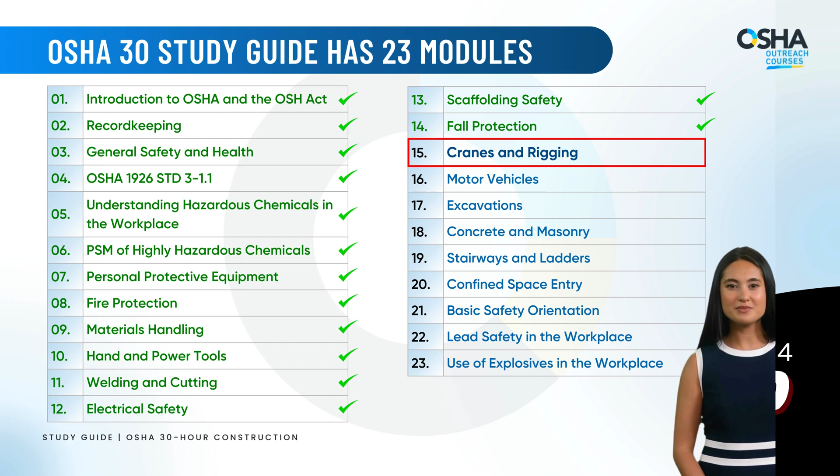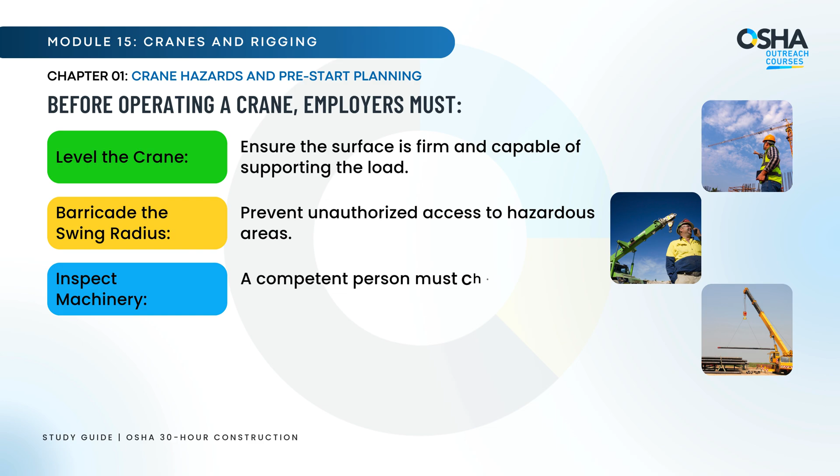Before operating a crane, employers must level the crane, ensure the surface is firm and capable of supporting the load, barricade the swing radius, prevent unauthorized access to hazardous areas, inspect machinery. A competent person must check for defects or hazards, coordinate with power line owners, maintain safe distances and clearances.

Remember, preparation isn't optional, it's a critical first step in crane operations. Now, let's test your understanding. Take a moment to think about these questions and discuss them with your colleagues.

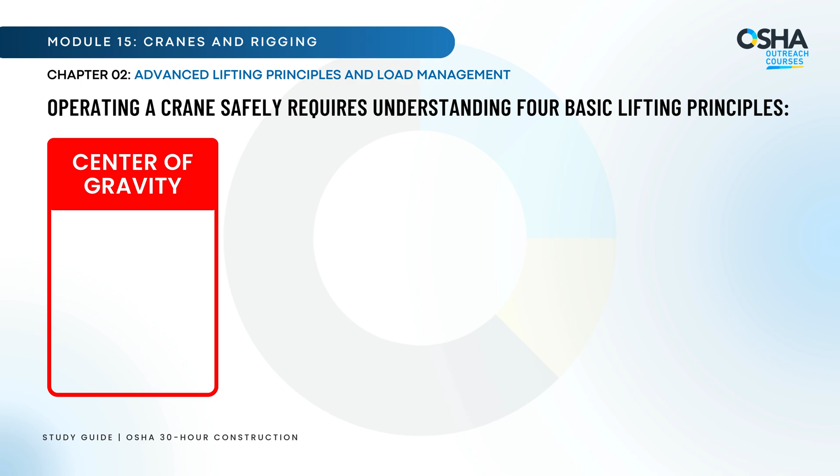Time to move to Chapter 2, Advanced Lifting Principles and Load Management. Operating a crane safely requires understanding 4 basic lifting principles. Center of gravity, the point where a load's weight is evenly distributed. Leverage, the use of balance to prevent tipping during lifts. Stability, the relationship between load weight, boom angle, and radius. Structural integrity, ensuring all components work cohesively to support loads.

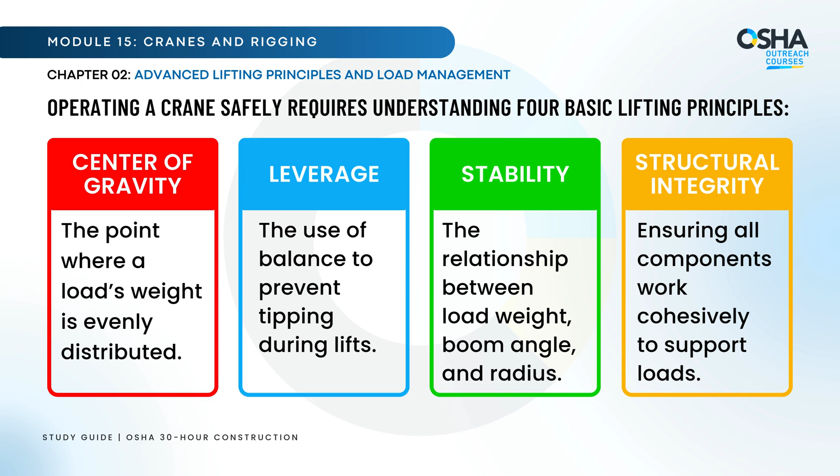Crane operators must identify load weights found on shipping documents, verify lift calculations to ensure the load is within the crane's rating, consider external factors like wind conditions, side loads, and uneven ground.

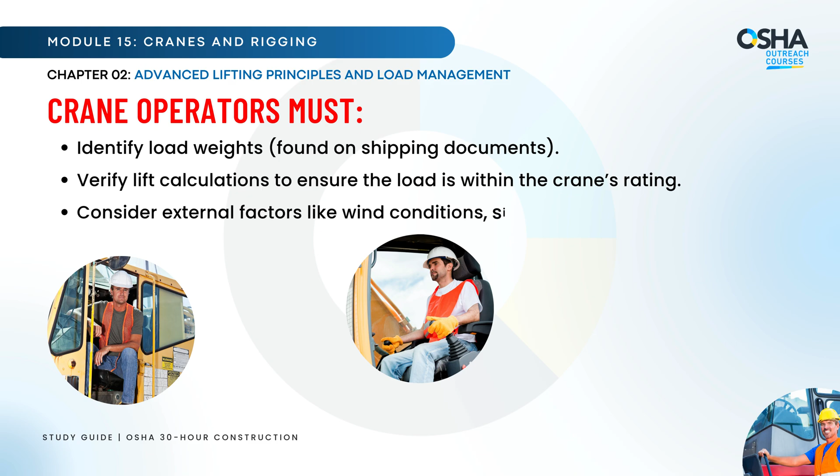A worker once underestimated the impact of wind during a lift. The swinging load caused the crane to destabilize, nearly toppling it. The lesson? Always consider weather and site conditions before starting a lift. Mastering these principles ensures safe and efficient operations, protecting both workers and equipment.

Now, let's test your understanding. Take a moment to think about these questions and discuss them with your colleagues.

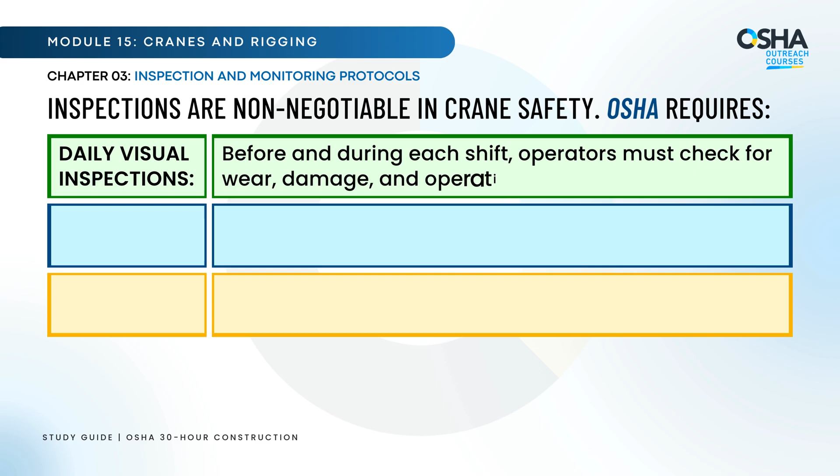Welcome to Chapter 3, Inspections and Maintenance, Preventing Catastrophes. Inspections are non-negotiable in crane safety. OSHA requires daily visual inspections. Before and during each shift, operators must check for wear, damage, and operational issues. Monthly inspections, conduct a more thorough review and keep records on site. Annual inspections, a documented, comprehensive check by a competent person.

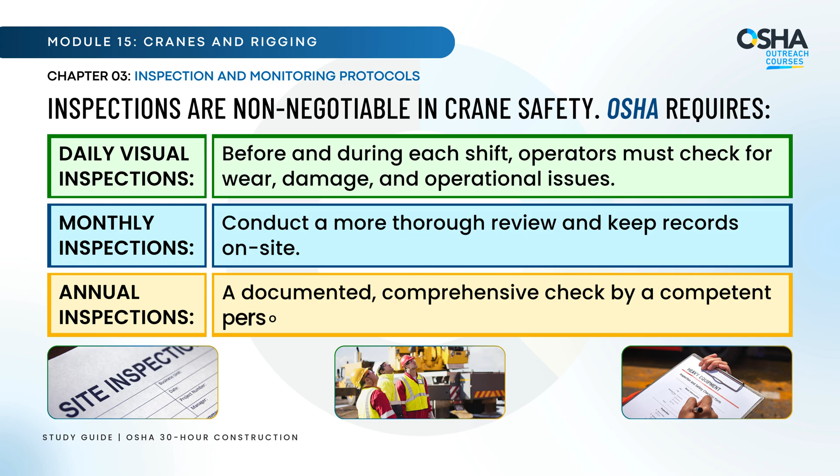What to inspect? Wire ropes for frays, kinks, or broken strands. Brakes, outriggers, and boom angle indicators for proper function. Bolts, nuts, and other hardware for wear or looseness. Hydraulic leaks and tire pressure.

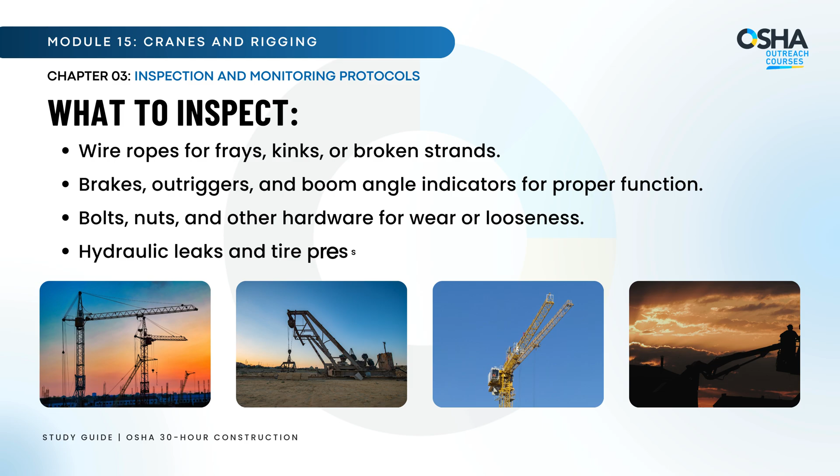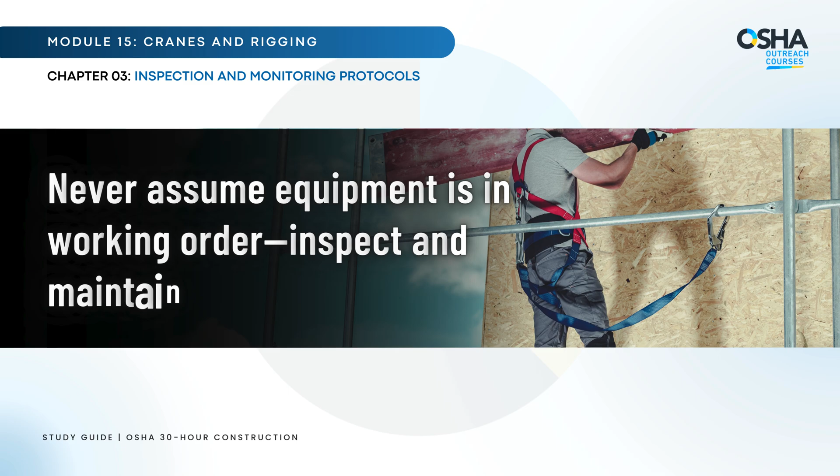During a shift, a loose bolt on a crane's rotating superstructure went unnoticed. When the crane began to swing, the bolt gave way, causing a collapse. Regular, thorough inspections could have prevented this incident. Never assume equipment is in working order. Inspect and maintain it meticulously. Now, let's test your understanding. Take a moment to think about these questions and discuss them with your colleagues.

Here's the final chapter, Rigging and Personnel Platforms, Ensuring Safety in Advanced Operations. Rigging is a specialized skill that demands precision and adherence to safety standards. Here's what OSHA requires. Rigging requirements. Only use equipment rated for at least 5 times the maximum load. Prohibited practices. Avoid using cranes to hoist personnel unless no safer alternative exists. Even then, strict criteria must be followed.

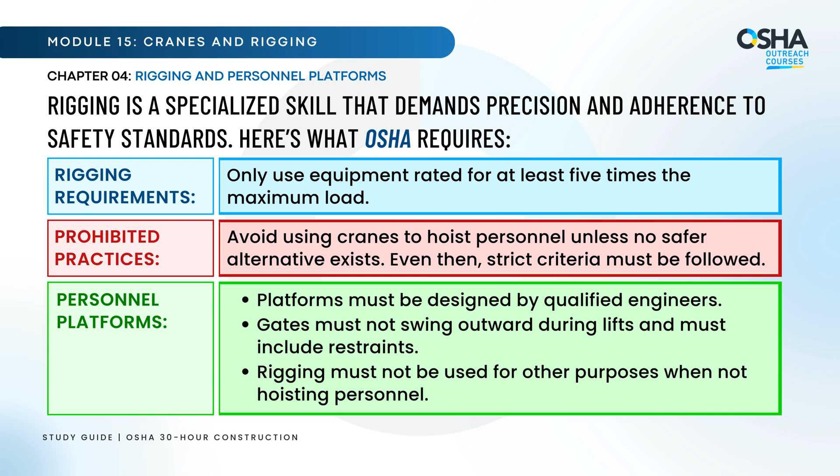Personnel platforms. Platforms must be designed by qualified engineers. Gates must not swing outward during lifts and must include restraints. Rigging must not be used for other purposes when not hoisting personnel. Operational criteria. Hoisting personnel must be done slowly and cautiously. The crane operator must remain at the controls when the platform is occupied. Operations must cease in bad weather or unsafe conditions.

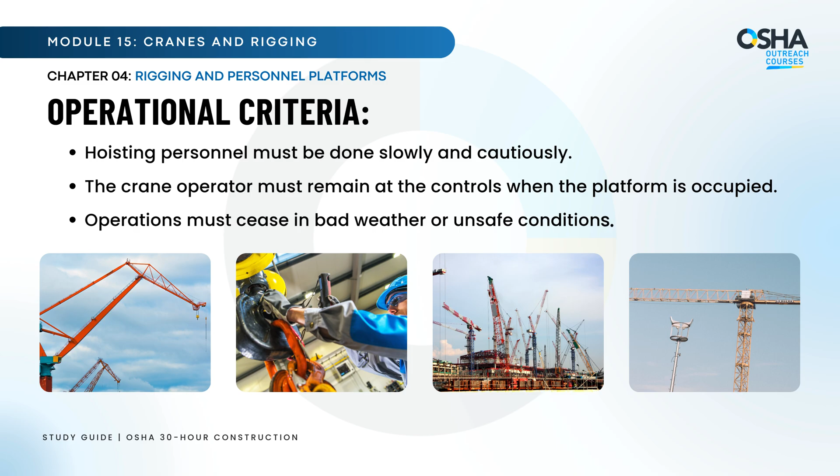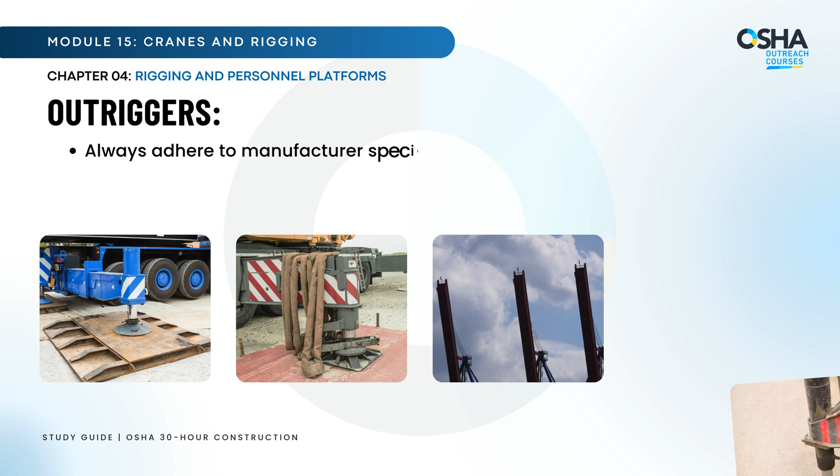A crew ignored guidelines and used a makeshift platform for a lift. During the operation, the rigging failed, causing the platform to fall. Following OSHA's strict design and operational criteria could have prevented this tragedy. Outriggers. Always adhere to manufacturer specifications. Ensure the weight of the personnel platform and rigging does not exceed 50% of the crane's rated capacity.

Precision and compliance with OSHA standards make rigging and personnel platform operations safe and reliable. Now, let's test your understanding. Take a moment to think about these questions and discuss them with your colleagues.

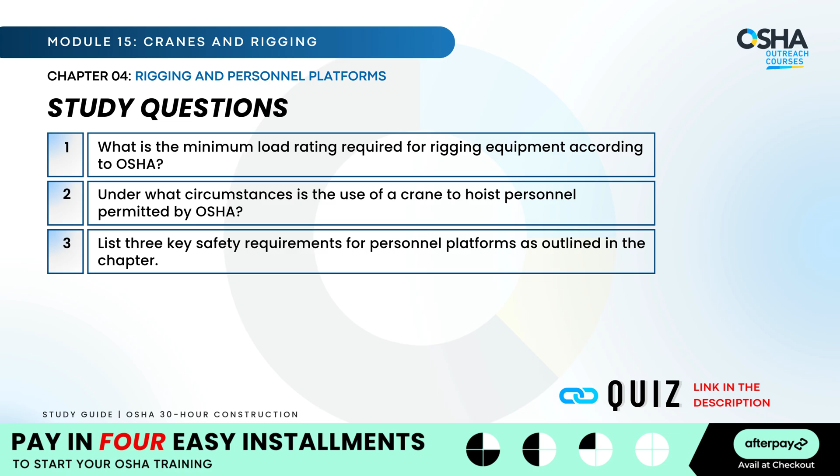Congratulations! You've completed Module 15 of the OSHA 30-hour construction training. By now, you've gained valuable knowledge that goes far beyond the basics, preparing you for the unique and challenging environments of construction work. Now, it's up to you. Take what you've learned here and apply it every day. Keep inspecting your equipment, practice your emergency plans, and be a leader in creating a culture of safety.